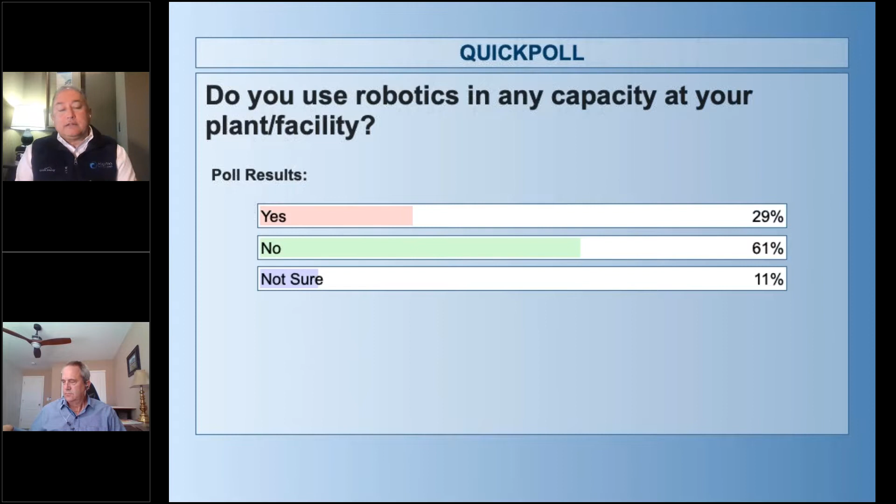I remember just walking through various Maximo customers and seeing little robots, and I think they were singing the theme from Raiders of the Lost Ark, and they were carrying products from one side of the warehouse to the other. So it's interesting how it's proliferated. Those robotics can be on the plant floor manufacturing things.

Okay, so let's go into a couple of other things. I want to talk about why Aquitas is so interested in this platform. So over the past 10 years since I joined Aquitas, and even more so in the past 3 years, we've seen these 4 trends kind of manifest itself.

There's a shortage of available resources at the plant or the facility necessary to do maintenance work. There's this great resignation, we're losing skilled workers. We always talk about the aging workforce leaving, and how this need in these maintenance and reliability organizations of how do they attract good workers?

Then there's the training of new workers that needs training the new workers to do the work that needs to be done and documenting that information. And then the third piece is these legacy assets that we want information off of, but don't have sensors, but still need inspections. It kind of all works together because you need people to do those inspections.

So this prompted us very early on to explore and deliver IoT solutions, though when we started, it really wasn't called that, it was just called integration. The goal was to help customers address some of the challenges we just mentioned, is how do we use those technologies to address those things?

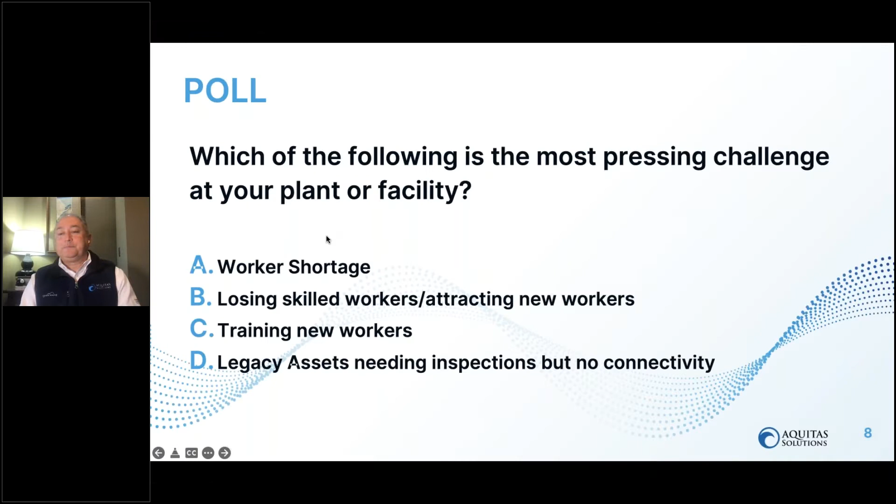All right, Rachel, let's see what the results are. Oh, kind of well spread out there. I like it - I don't like it, it just kind of speaks to that. Attracting new workers is tough, and then this legacy of inspections with no connectivity - I think that is highly revealing.

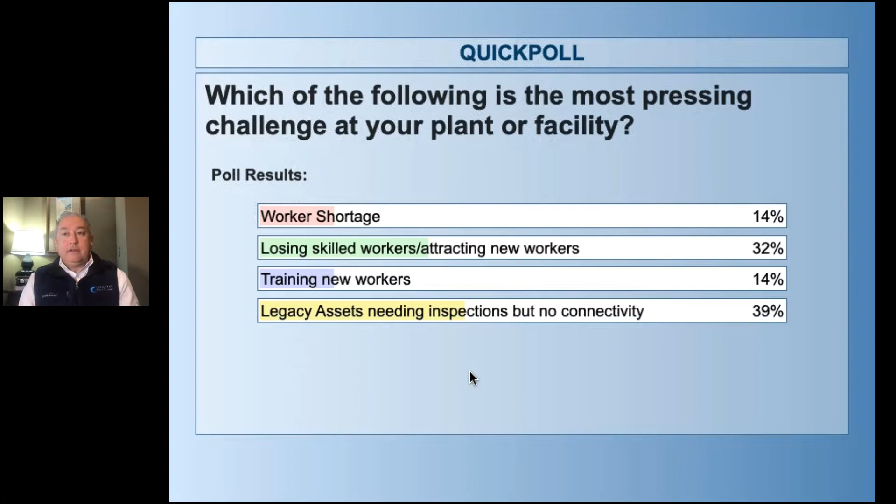Okay, so let's get the presentation back up there, if you would, Rachel. And what I'd like to do is turn it over to you, Paul, with all of this information as a backdrop - give us a little context here, take us through Spot as a platform and use cases.

Let me just kind of introduce you to the portfolio of robots that we actually have at Boston Dynamics, and there's actually 3 in there. You can go to the next slide. There's 3 in there right now, but we'll continue to augment this as we move forward, and I'll just introduce you to the starting lineup here.

It attracts folks from the type of colleges and universities you might imagine, because they get to work on this robot every single day. And the purpose of their efforts is to really kick the leading edge of the electronics, the materials, the batteries, the software that goes into designing a robot that has capabilities to maneuver.

So if you've ever been to an Amazon facility or huge Walmart type of facility where they have 300 truck bays, and the trucks pull up and each one of them are filled up, and they put an army of people in there to move these boxes to pallets and things like that - Stretch will do that more effectively, faster, and at a less cost than your labor force. So that's what Stretch is all about.

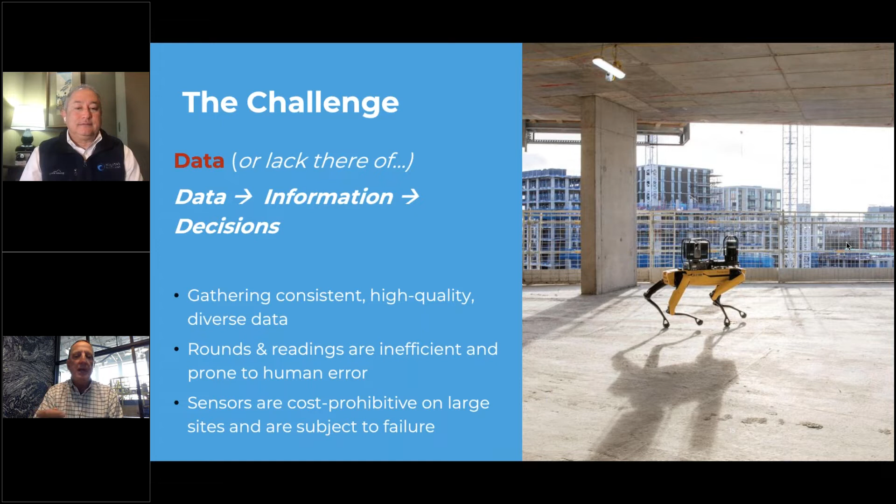So the next slide, which is what we'll present as the solution, which is something we're calling dynamic sensing. It's really a simple marketing term that talks about this concept, and Nicholas talked about this, where in many factories and facilities that are traditional or legacy-based, the ability to go out there and retrofit these facilities with fixed sensors throughout on perhaps thousands of different assets would be just cost-prohibitive and time-consuming, right? And then you'd still have the problem: well, now we're just capturing more data.

So the concept of what people do today is they hire some people—the people they can't hire anymore—or they take one of their very high-value mechanics or engineers to do these jobs with a clipboard and go around doing these inspection routes to capture the data. Neither one of those options are very viable anymore. So what can I do? How do I automate the process of capturing data, doing those inspections, gathering the data, and then processing that data? And that's what dynamic sensing is all about.

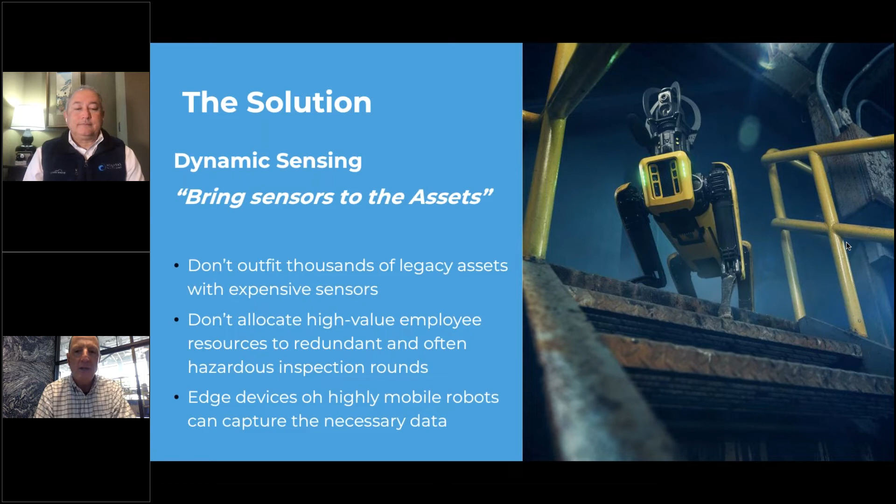So next slide, let me talk a little bit more about this. Next slide again, Rachel. When we talk about Spot, we're going to start looking at all these different types of use cases that kind of emerge. And people ask me, what does Spot do? Well, Spot is a robot that walks around and will get from point A to point B very efficiently. That's really what it does. What our partners do, and what we do, is enable solutions that reside on top of Spot, that require a vehicle to take the solution to a particular area.

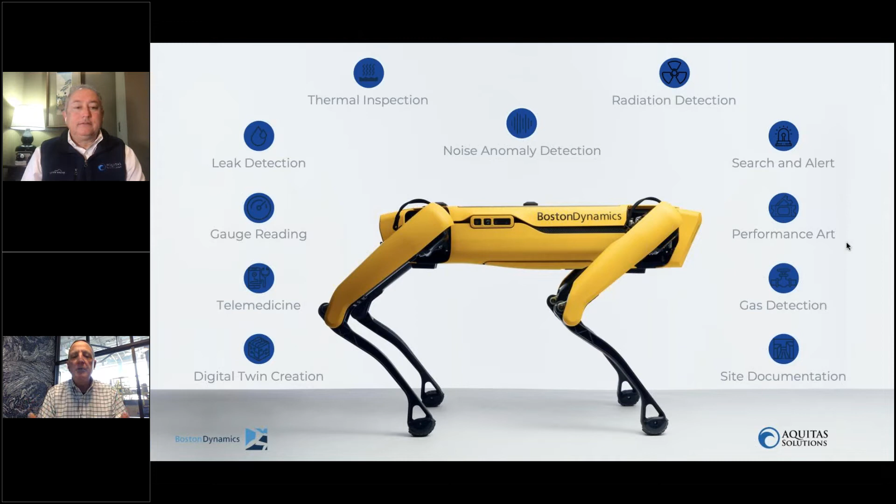And all of these different use cases, and this is just a sampling—Nicholas mentioned ammonia detection, gas leak detection. The canary in a coal mine: we send the robot into the mine first to see if there's any gases in there before we send our humans in there. So all of these types of use cases started emerging, all because they were enabled by the mobility of Spot. So the next slide, Rachel.

You may want to take a quick zoom-in image of a weld that looks like it's giving way, or a steam valve, or look at any type of corrosion taking place. All of that can be done with that pan-tilt-zoom camera.

On top of that is an infrared camera. As you're making your way around and you stop in front of the motor, you may want to take a reading to say, what's the temperature range of this motor at this current time, and is it in tolerance?

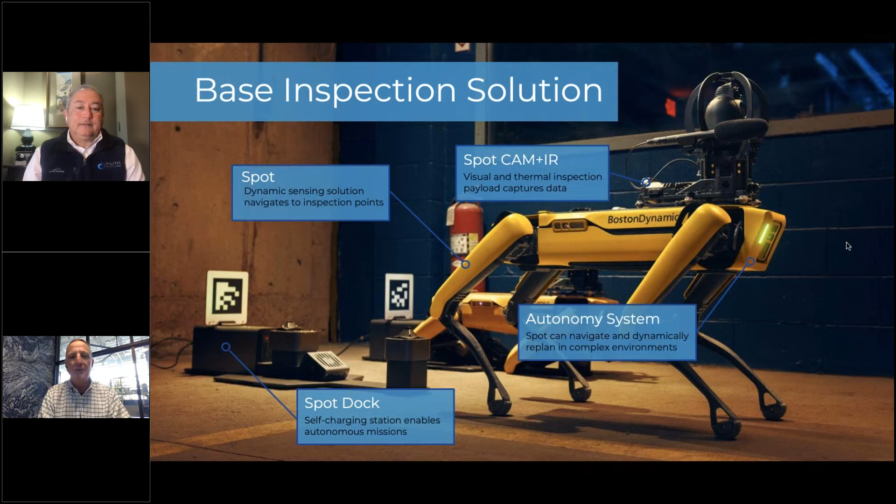When you have workers who have been around for 30 years doing these inspections, one of their value propositions is the content knowledge they have. They walk around, they can smell it, they can see it, they can listen to it, and they just know something's wrong. You can't teach an old dog those types of tricks overnight, for example. But Spot's going to go a long way.

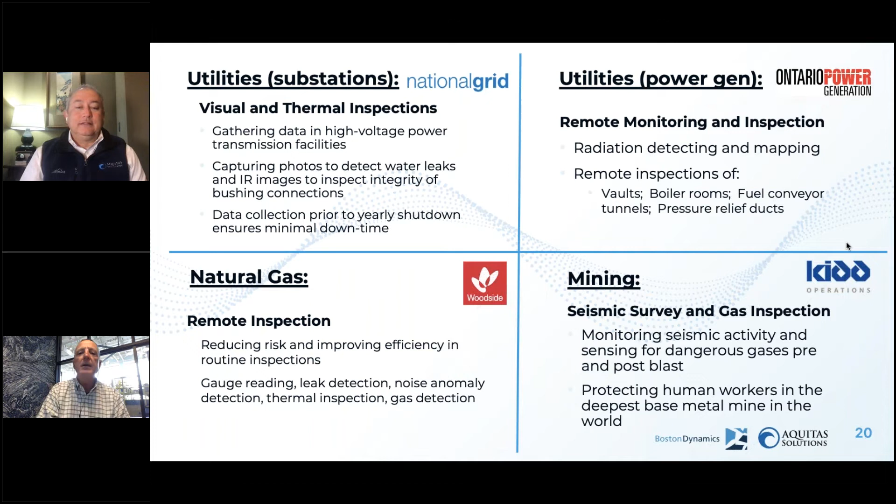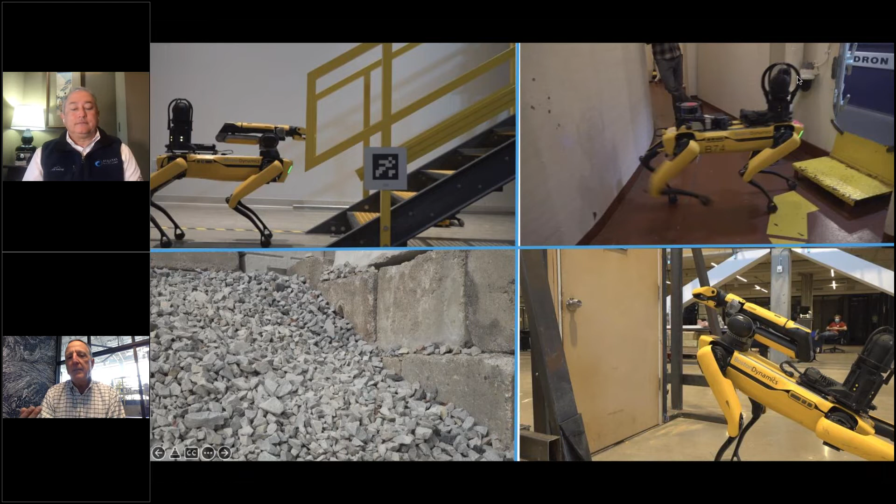First, I'd like to talk about the athleticism - if you could run the video in the upper left-hand corner, Rachel. I'm going to talk a little about the athleticism of the robot. What can it do? This is really where the focus of Spot is all about. It can walk up and down stairs by itself, and that's not an easy thing for a robot to do if you think about it. It needs to understand the size of the riser, the depth of the riser, is it a metal riser, is it a grated staircase? It needs to know where the banisters are so it knows where to step going up and down stairs. Comes in very handy.

And then the lower left-hand side, if we can run that - hey, video. Paul, I was going to say, getting older, I'm having trouble going upstairs, let alone figuring all that stuff out.

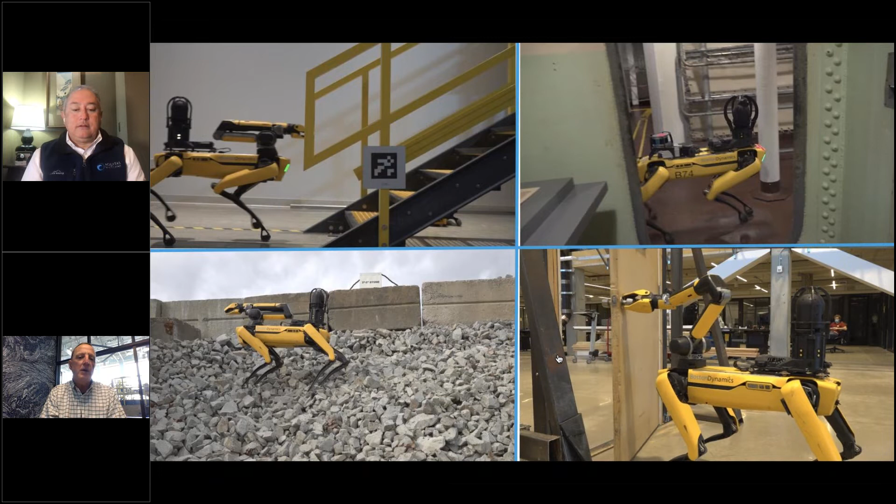And then the final one down below is just a fun one. If you really find an obstacle in front of you, like a door, what do you do? Well, Spot has a manipulation arm, we call it the gripper, that understands how to open doors. So it knows - hey, this is a doorknob, the doorknob's round, I turn it to the right, then I push and pull to see if that door goes in or out. I realize it comes back, so I put my left paw behind the door to keep it ajar. I open the door, and then I walk through.

So that's a little bit of sophistication about how the robot has athleticism. Now, how do I take that athleticism and make it valuable to a manufacturing site, a security element, things like that? Next slide, please.

So this is the second part of Spot, and really this is probably the more important part of Spot. It's not as much fun to look at, not as much fun to watch, but this is where the rubber meets the road - this is where the ROI is delivered. Spot has an API platform that allows partners and customers to build customized solutions on top of it. These are very important because it's not just a box that sits on top of Spot, it's a means of communicating to the robot itself. And it comes in three key areas that I'll talk about.

On the left-hand side is data capture - this is exactly what we're seeing. Can I go around and capture data? Depends on the data I need, right? Images, temperature, audio, laser scans, etc., gas detections. Those types of platforms are basically dynamic sensing - can I take sensors I need to capture information, have them communicate to the robot, and then use that information as we move forward? Once I've captured information, the next part is the data analysis.

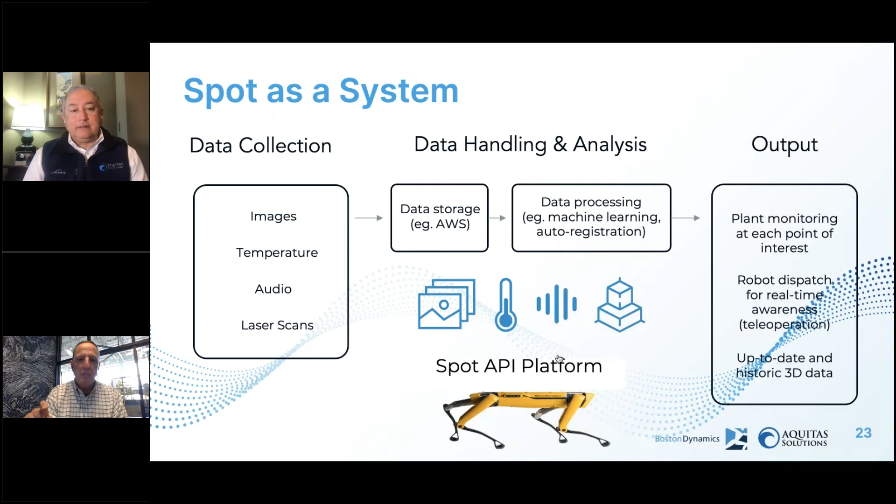So just kind of wrapping up the why Spot. Transformative mobility like you've never seen before. You've seen me at any of these conferences, and if you haven't, come see us. I'm up in the Boston area. I'd love to take you for a tour of the room right behind me where Spot lives. Ray spent some time up here a few weeks ago, and I'd love to have you up there anytime you want. That's the flexible platform I just talked about, the platform where we build up the solutions.

This autonomous inspection, there's really two kinds. There's autonomous inspection, where the robot goes around by itself and captures data. And then there's remote inspection, right? Where your facility is 200 miles away and something happens. What do you do? Do you get in your pickup truck at 3 o'clock in the morning and drive out there to check on that gas leak? Or do you log in through the browser and fire up Spot and say, hey, go take a look at this for me? That's remote inspection, and Will's going to show you that.

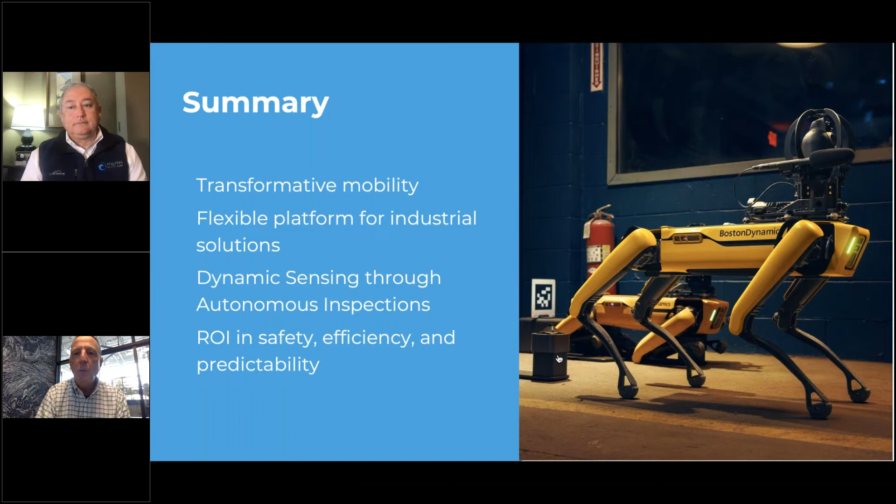And then the key ROI is easy: safety, efficiency, predictability. You take those three, you plug in your ROI for Spot, and you're going to see not only is it paying for itself, it is adding to your bottom line. So with that, I'm going to turn it over to Will for a quick demonstration, and then we'll be back for questions and answers.

Awesome. Thank you, Paul.

So I will share my screen. It's always the tricky part, Will, right here. This is where it all comes together. Okay. Yes, okay.

Just need to make sure that, okay, you are seeing my control screen, correct? Yes. Yeah, tell the people what they're seeing so they understand.

Perfect. So this right here is our Scout platform. Essentially what this allows you to do is drive Spot through a web browser. The benefit of that is basically what Paul alluded to - if you've got a remote location that's about 200 miles away, rather than having to roll trucks to go there, you can now access Spot through the internet to get situational awareness. It really allows you to drive it from the other side of the building, which is what I'm doing right now, the other side of the country, or even the other side of the world, wherever you have internet connectivity. But I'm going to do a few things here and drive Spot.

So I just clicked here in the screen, and as you can see, Spot is moving. I can also use the keyboard - the W, A, S, and D keys, if you've ever played a computer game, that's probably very familiar. You can move Spot all around. You can also get situational awareness by cycling through the camera views here. As you see, I'm going to look at the back, so this is looking at the back of the robot.

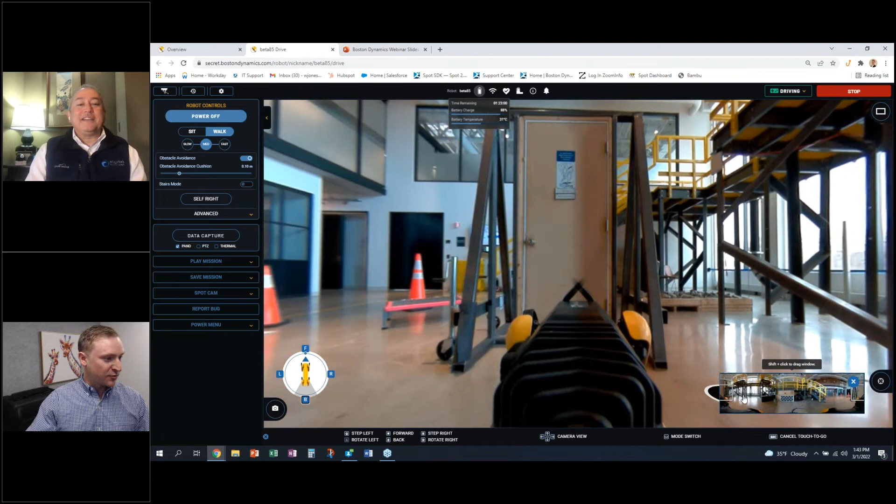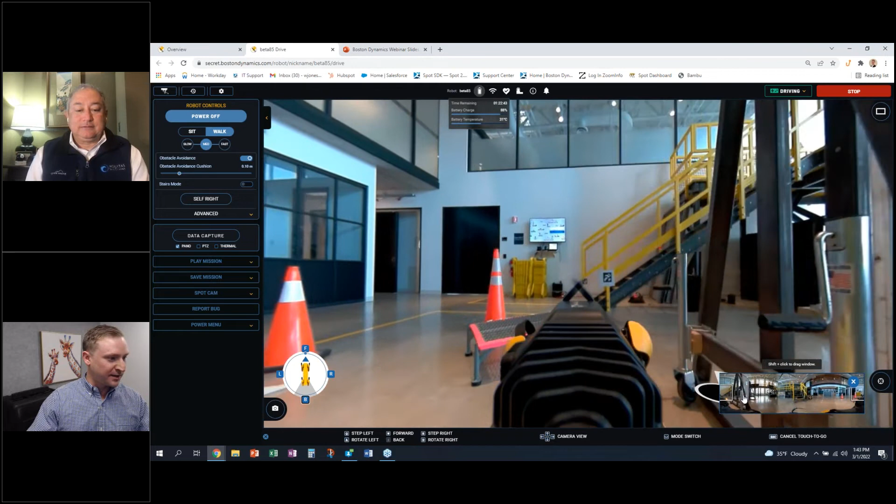That's good, Will, so that it's not Paul taking a camera around directing them - they can actually see Spot walking. Exactly. And what we'll do here is just show Spot walking around a little bit here, so you can see that Spot actually really is truly moving.

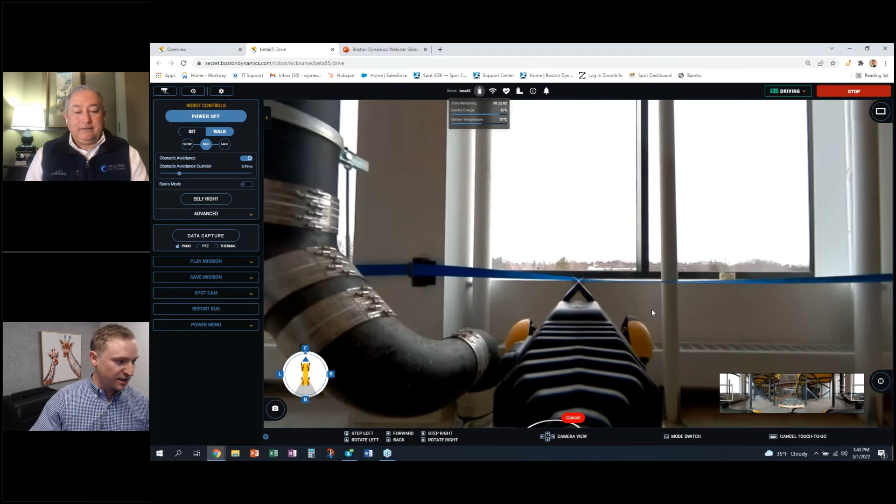And what I'm going to do also is just have Spot go over these rock boxes over here. So we're going to line Spot up, and I'm just going to use my touch to go feature, and we're just going to have Spot go over towards these windows, and you'll see Spot navigates right up and over these rock boxes and makes its way to the location. As you can see, Spot is very, very easy to use using this platform.

So we'll do the same thing going forwards. Now I'm going to press over here over these rock boxes, and Spot just navigates its way over any sort of obstacles. So I'm going to go right over here, and Spot's going to go over that grate. If we look in the back right here, we see that Spot just went over that grate right there.

So the nice part about Scout is that it allows you to adjust many of the parameters of Spot. You can turn off the obstacle avoidance, you can adjust the obstacle avoidance sliders, you can adjust the speed of Spot. It also has stairs mode, and then self-righting. Anything with legs will fall, so we have the ability here to have Spot self-right itself if it ever does fall. You can also adjust things such as height, tilt, and some other detailed ground friction characteristics.

You have the ability here to transfer missions back and forth between Scout and the robot, so that way Spot can run autonomous missions directly from Scout. You also have the ability to control the payload that is on top of Spot as well, such as the lights, audio, and then if there was a thermal camera, you could turn on the thermal camera as well.

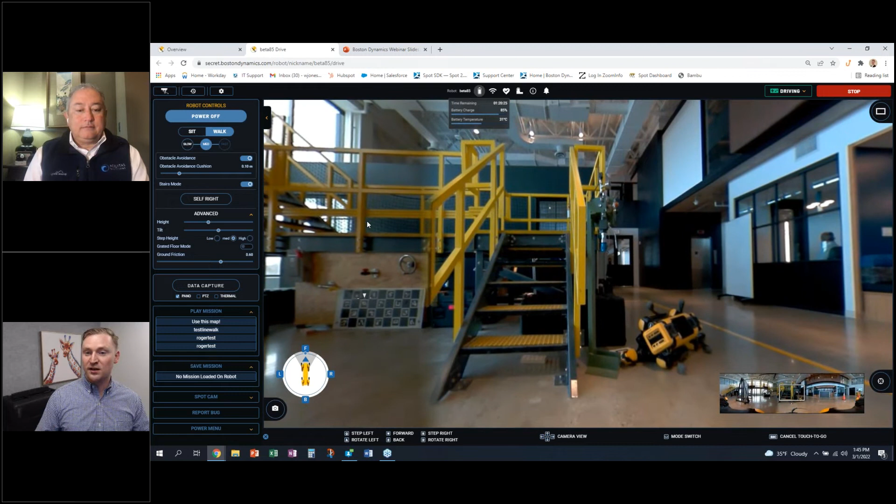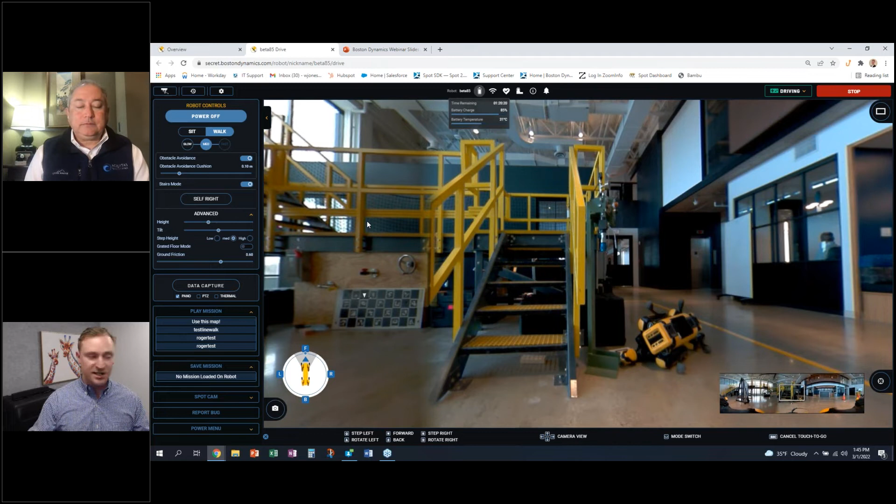So with this, we'll do some stairs. I'm going to turn it into stairs mode using the slider over here on the left, and then I'm going to bring it over to these stairs over here, and then just take it up the stairs. Stairs mode gives Spot a little more understanding that it's actually on stairs. It understands the edges a little bit better, how deep the stairs are. It keeps Spot centered in the stairs, adjusts Spot's speed and angle on the stairs to make it go much more reliably up the stairs.

So we'll just send it right up. And all I'm doing right now is just pressing the W key forward, and Spot is doing everything else. So I am only pressing W, Spot is doing everything else. So I'll turn it, and we're going to go up.

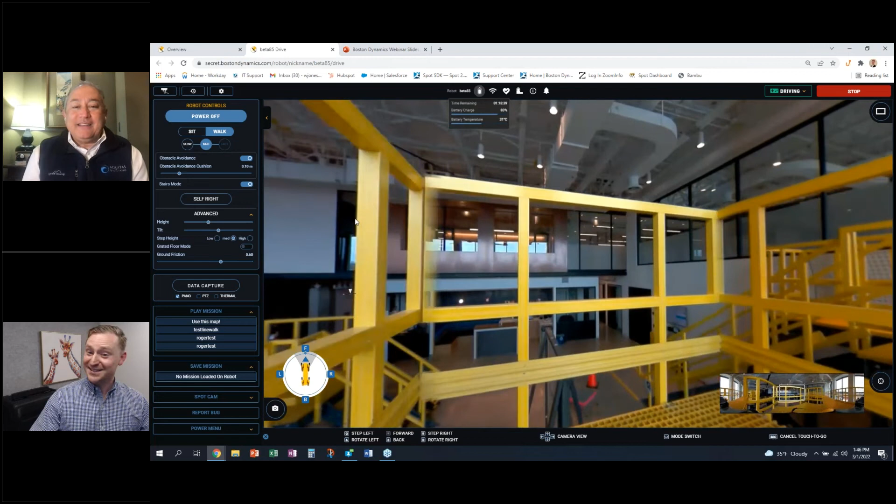So just imagine that we are in an industrial facility right now, and you need to get situational awareness on some assets that you need to climb up on top of these catwalks through all kinds of stairs and things like that. These are some very real applications that we see our customers interested in. It's really a little bit like the Tesla of robotics, in that yes, you're kind of in control, but you can let it be on its own control to navigate.

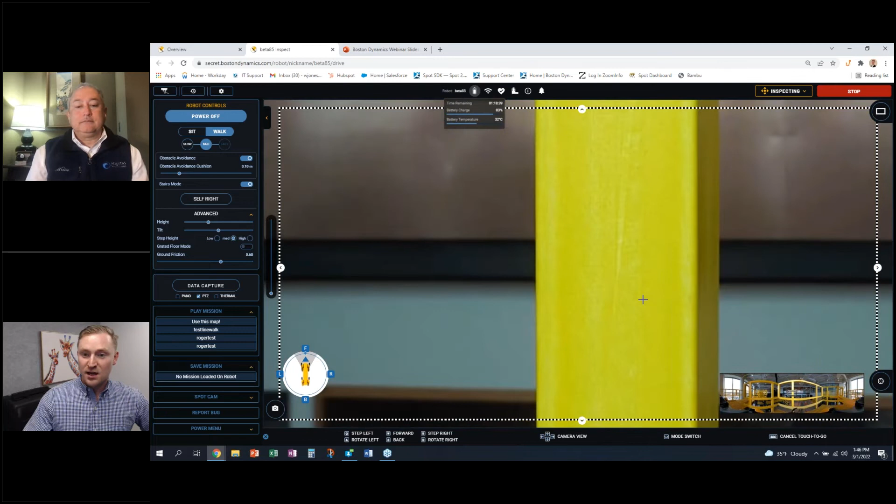Really cool stuff. And then so from here, so right now I'm in driving mode, which you'll see right up here. I'm going to switch it to inspecting mode. So what inspecting mode does is we now are using the 30 times optical zoom pan tilt zoom camera. So we're going to zoom right here, right into Paul, and you can see that he just picked up that Hershey's bar right there.

But this right here gives you a good understanding of how detailed of an inspection you could do. So if you did need to look at a gauge or an asset or a weld, you absolutely could do that. And then you can press these little buttons around here, and you can move. So we can zoom in a little bit more to really get a better understanding, and maybe you can see the nutrition facts on the Hershey's bar if you're interested in that. Yeah, we see that there's one Hershey's missing that Paul took. Paul definitely took that one. But as you can see, you can do some very detailed inspections using this feature here.

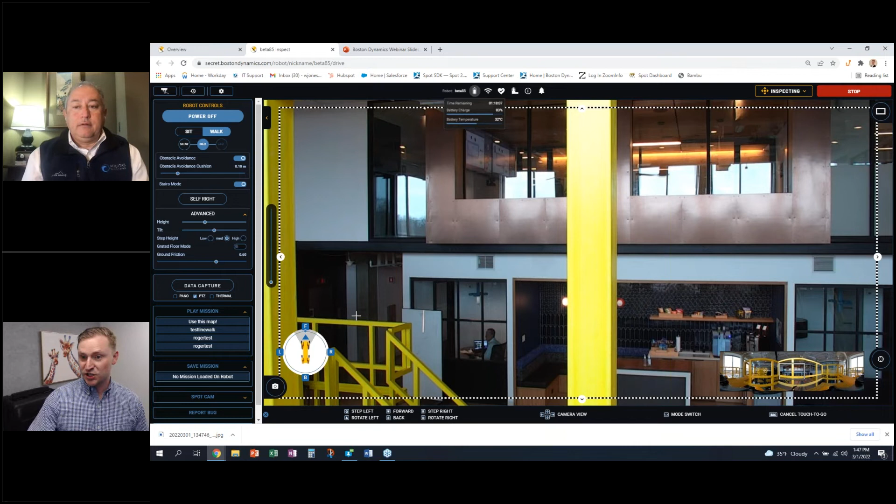You can also, there's a button right down here in the bottom left-hand corner. I'll click that, and that allows you to take a screenshot of whatever you were just inspecting. So say there was an issue and you need to record that, you can take a screenshot of that and say, here's the issue that needs to be fixed.

Hey Will, is that using an accessory camera, or is that the camera that's built into Spot that it uses to navigate? So this is a payload camera, essentially an accessory camera.

The way that Spot drives is it uses these onboard cameras that you can see here. So these are looking through Spot's onboard cameras, and that's what Spot uses to navigate.

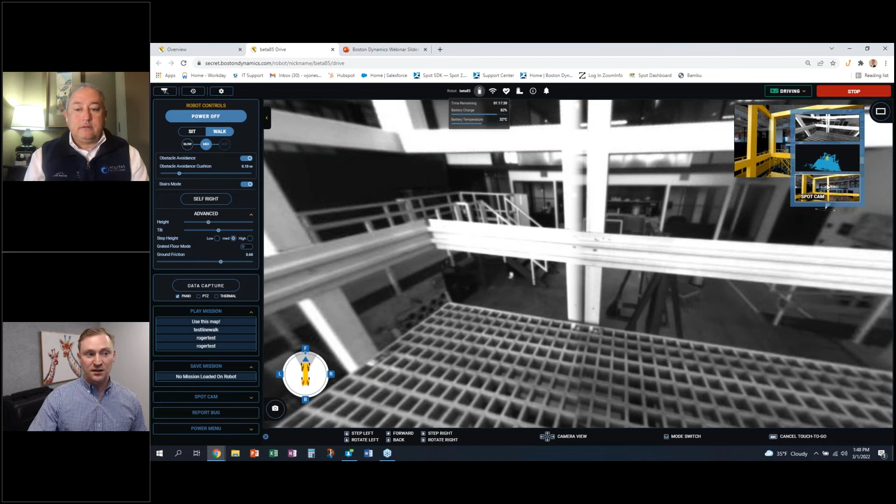But in order to get some detailed inspections, that's when we switch to the camera that's on top of Spot, the big black camera that was on top, and that's what it uses.

So now we're going to rotate it around, continue walking over here, and bring it back down to the ground floor. I'm using my WASD keys to navigate Spot around, and then we're going to bring it down these stairs over here.

The way that Spot's legs are designed, it walks more reliably downstairs backwards. So that's why I'm rotating Spot around, we have it lined up to go down backwards.

We're still in stairs mode, and I'm just hitting the S key to walk Spot downstairs backwards, and Spot is now doing all of this on its own. All I have to do is just say go down the stairs, and Spot figures out everything else on how to navigate those stairs. So we'll put the front camera back and navigate Spot around.

This is actually a perfect spot right here. So if I go to the Spot cam, you can turn the lights on. As you can see on those reflectors, that now shows that the lights are on. So if you're in a really dark area, you can use the lights to help with that.

Another thing that is very valuable about Scout is we're going to look at the session history. This allows you to review the data that you captured from your mission. So we'll look at this mission here, and we'll look at this action here.

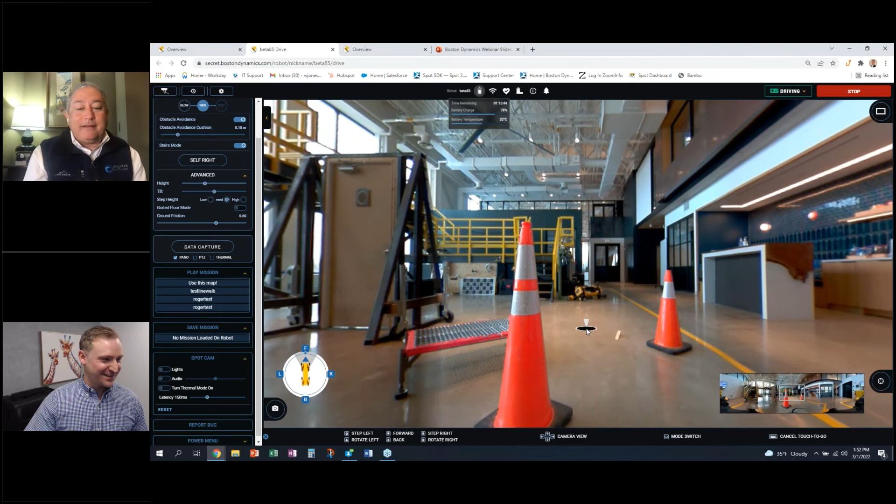Hey Will, before you leave, can you have Spot back up there for a second? There's always people who say that was probably recorded. So we were going to hold up today's edition of the Boston Globe, but nobody gets the paper anymore. So why don't we have it walk over to the resting spot and then turn back to one of those cones? Yeah, absolutely, not too difficult to do.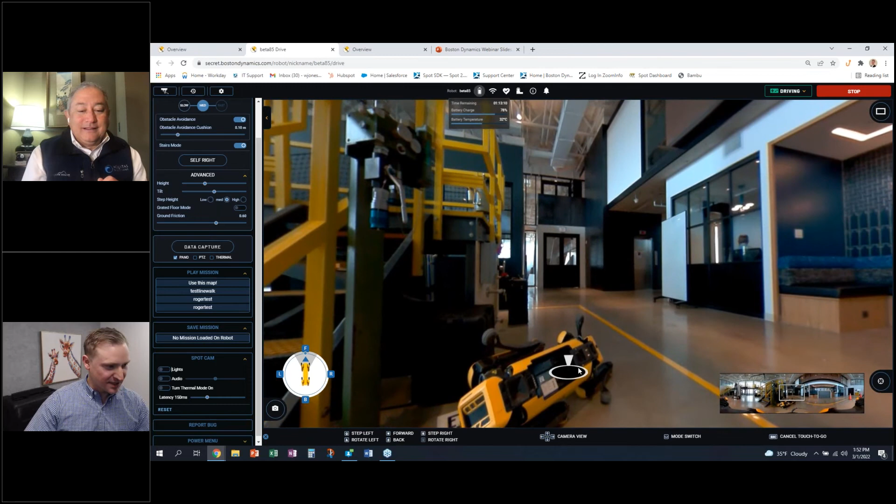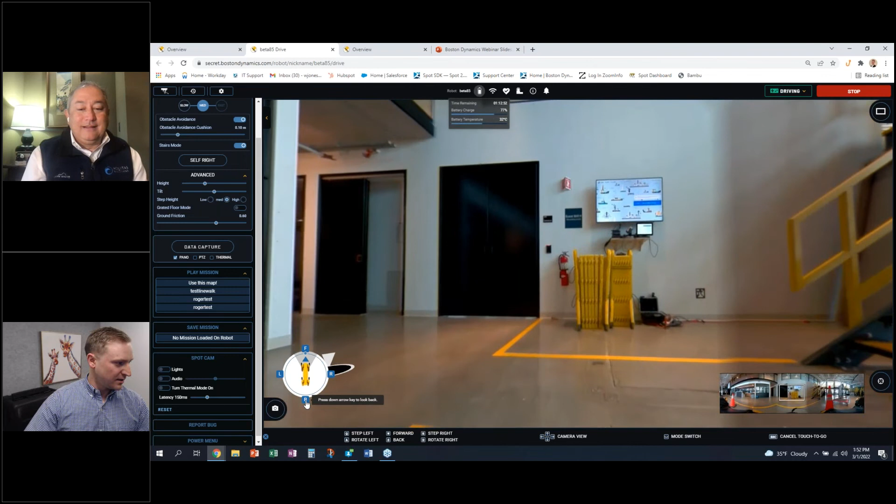There you go, absolutely. We're just turning Spot right around, and I'll click over here, and it is walking all on its own. Here, I'm going to put it right through the back camera, and you can see - Spot decided that the most efficient way to get there was simply to walk backwards.

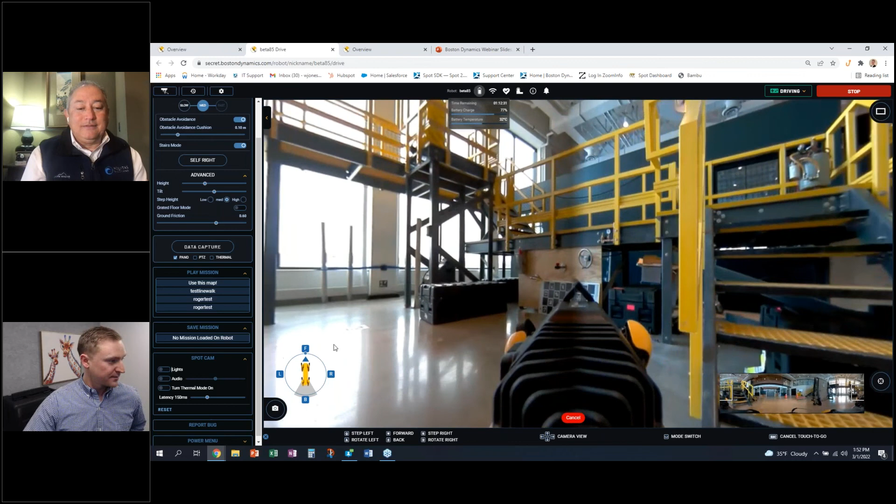Yeah, we did have Paul wearing the same shirt when he went to go get the Hershey bar, so at least we planned that correctly.

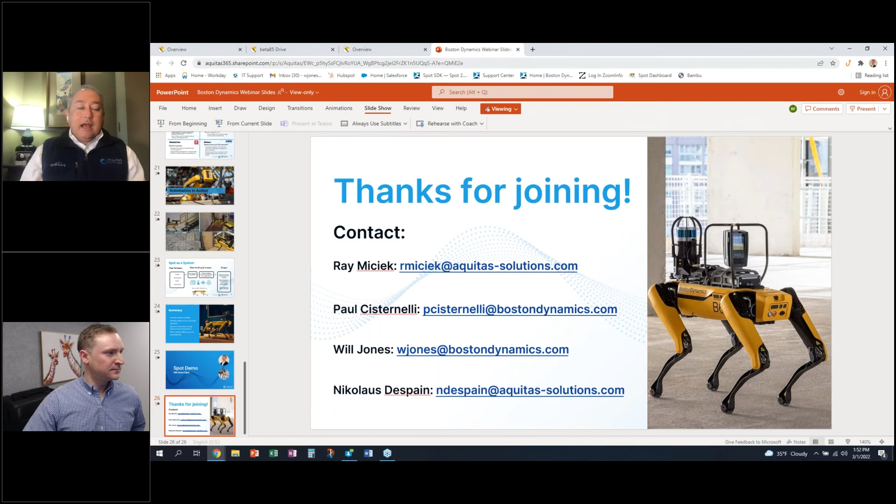All right, hey Will, thanks so much. I think we'll go to Q&A now. There were a couple of questions in the chat. One was, what is Spot? Hopefully Nikolaus can come back on camera - not sure if there will be questions for you, but we'll put them out there. What is Spot? That was the question, and you answered it: it's a platform that allows you to bring those instruments, if you will, to the asset.

Dynamic sensing - I love that, Paul, it's a great term. So one of the questions that also came through was, what is the battery life of Spot? That should be an easy one to answer.

Yeah, sure. The battery life is approximately 90 minutes on a single charge. The robot will get up, do its thing, and take advantage of the long mission for about 90 minutes. Now I caveat that by saying the more you put on Spot, because everything that goes on Spot is also drawing from the same battery charge, you may lose some efficiency. But targeting 90 minutes, it will go back to its docking station and get about an 80% charge relatively quickly, just like most batteries do, and be able to come up and start driving around again.

When people purchase Spot, they get two batteries and a remote charger. So typically what happens is you're always charging - you can do a quick swap out of the battery and then continue working with Spot. So 90 minutes on a single battery charge, you swap out the battery, the old one goes into the charger, and you continue working. That's great.